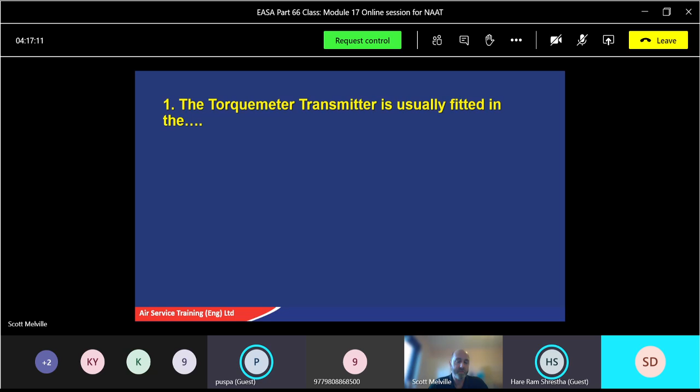Anybody got an answer? Reduction gear, reduction gearbox. Yeah, reduction gearbox - just where your PCU, your CSU, it all fits onto the reduction gearbox. Torquemeter transmitter, good.

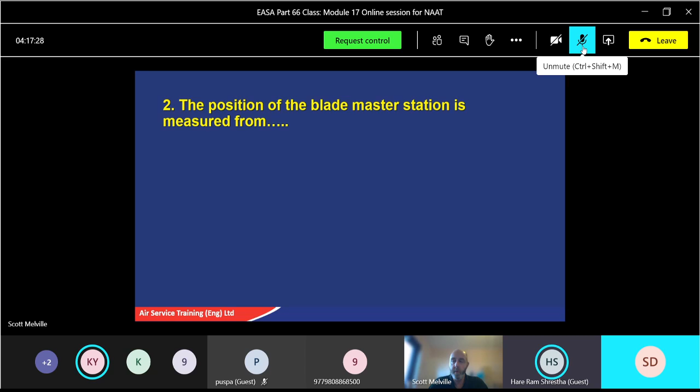Question 2: the position of the blade master station is measured from where? Center of hub. Yeah, center of the hub, good. Just for a bonus point, what colour would it be on the blade? Yellow, yeah, like normally. Sometimes they have them, sometimes they don't. If it doesn't have one, you just measure it from the hub.

Number 3: the blade angle on the propeller is the angle between what? Angle of attack plus advance angle? Not quite, no - it's the blade chord line and the plane of rotation. So the plane of rotation is vertical, the chord line of the blade, and in between that you've got your relative airflow. That gives you your blade angle, with the helix angle being a bit in between as well. We'll put a diagram up - hopefully you've been given the printout, and if not I'll show you what I mean.

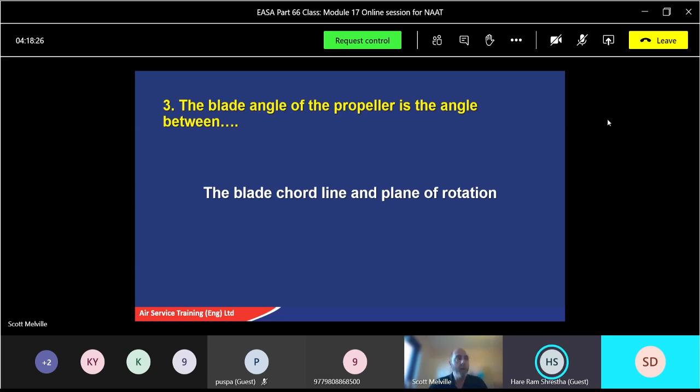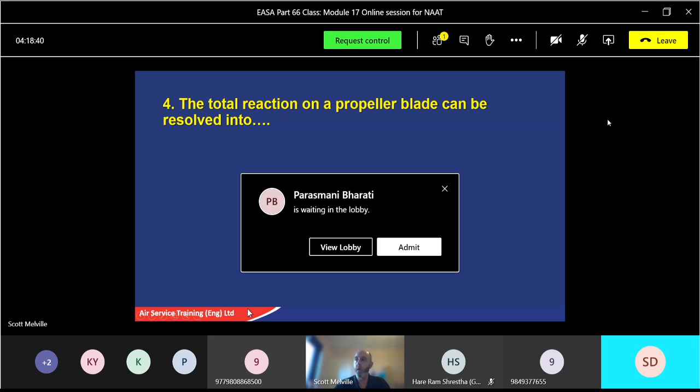Question 4: the total reaction on a propeller blade can be resolved into what? Thrust and torque. Yeah, so total reaction is the resultant between those.

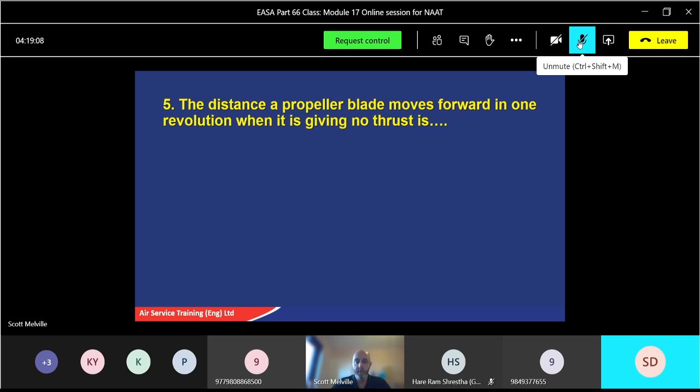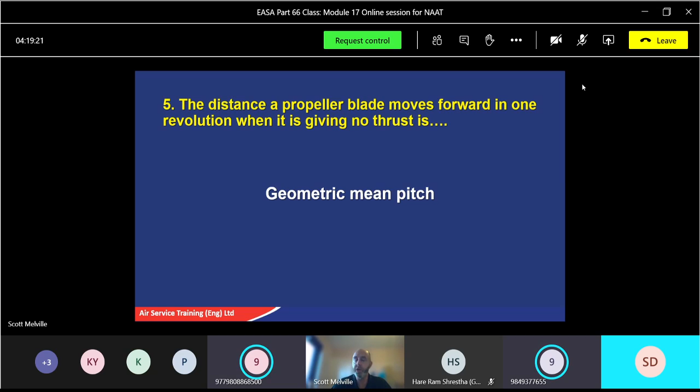Number 5: the distance a propeller blade moves forward in 1 revolution when it's giving no thrust is called? Geometric pitch. Yeah, it's theoretically what should actually happen - when there's no thrust, it should travel that amount of distance in one revolution in theory, but we don't get that because of aerodynamic forces. That's the geometric mean pitch, or geometric pitch as we call it.

Question 6: during forward flight, the propeller angle of attack varies with what? Forward speed. Yeah, so if we increase speed, the angle decreases. If we decrease speed, the angle obviously increases.

The thrust force during flight causes propeller blades to physically do what? Bend forward. Yeah, the blades are trying to go forward because they're getting the thrust, or what we used to call lift on a wing. So they're trying to bend forward, and that reaction is pulling the aircraft forward as well - they bend forwards in the direction of flight.

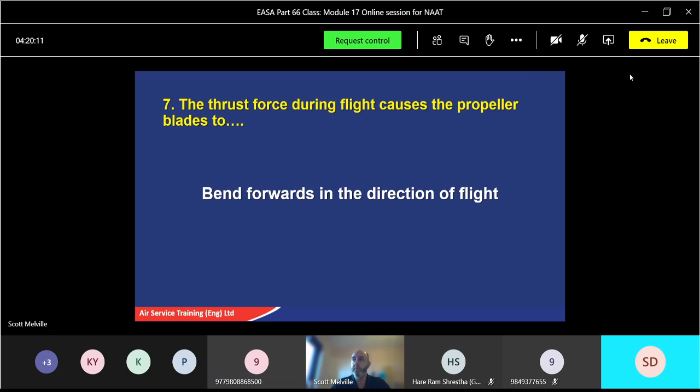The flyweights in a propeller control unit will actuate what? In other words, they will move what? What will the flyweights move?

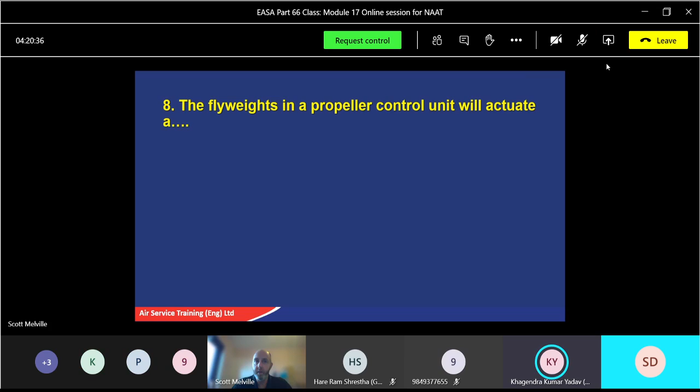What have we got there? The slide valve, or the pilot control slide valve. Basically the vertical valve that moves up and down, because your flyweights, as they get faster, will spin outward and lift the valve up. Or if they get lower, because they're going at lower RPM, they'll drop the valve down until they get to a neutral position where it stays.

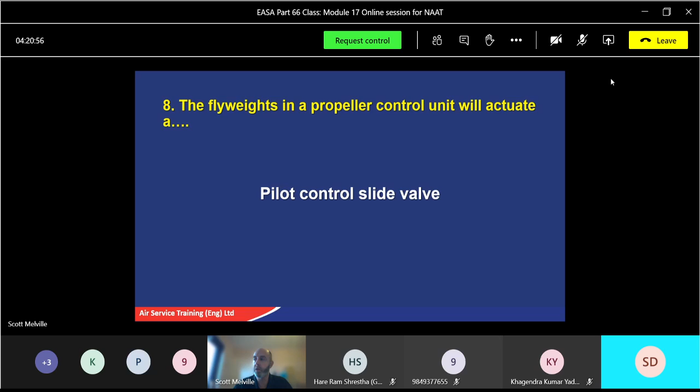With a double action propeller, the on speed position is when oil is trapped in front and rear of the piston. Basically, you've got hydraulic lock, equal pressure in the front, equal pressure in the back. It's balanced up, the flyweights will be pretty much even, and we're in the on position. We're good to go, it's happy. It's waiting for a change in forward speed, a change in RPM, etc.

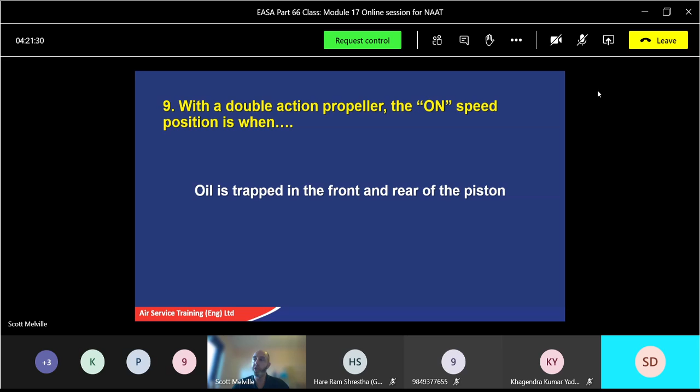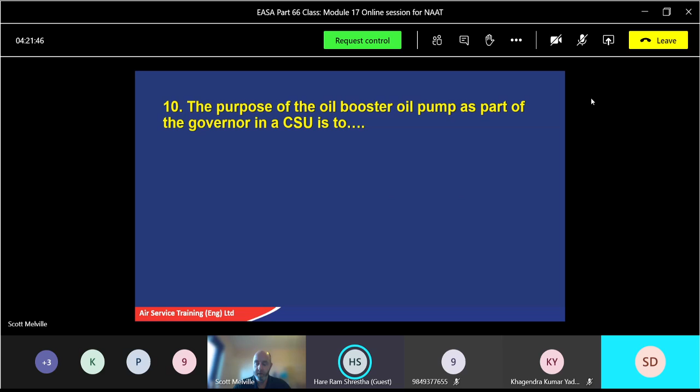Number 10, the purpose of the oil booster pump as part of the governor in a CSU is to unfeather the blade - provide enough oil force to move propeller blades into coarse pitch or feather pitch. Okay, next, the booster.

In a double acting variable pitch propeller, the feathering pump supplies - what does it supply? It supplies oil pressure to drive the propeller into and out of feather. Now, the pump itself doesn't supply the pressure, it supplies the flow, and your pressure is the resistance to flow, which is your pipework associated with that. But yeah, we can call it pressure in a way, just for general purpose, okay?

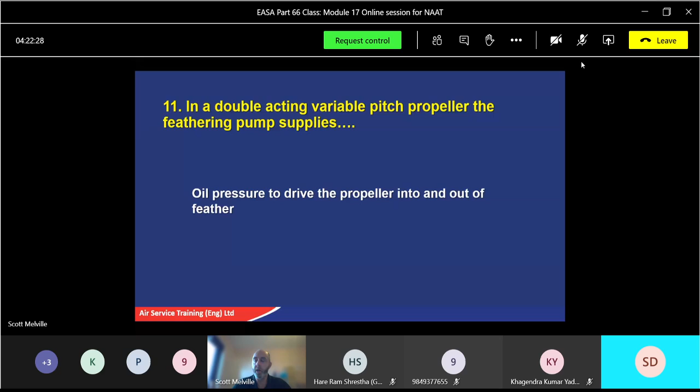Negative torque will occur on a propeller blade when angle of attack is negative. Strange enough, as it says in the question - sometimes the clue is in the question. The angle of attack has to be negative.

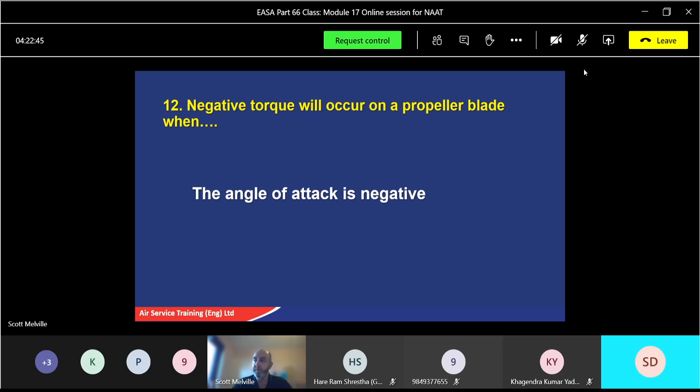Number 13, small stone damage to a propeller blade would affect its integrity - yeah, structural integrity. Any small stone damage, well, that's going to be a weak point. A weak point can possibly lead to a crack, and if there's a crack, that's very detrimental to the structural integrity.

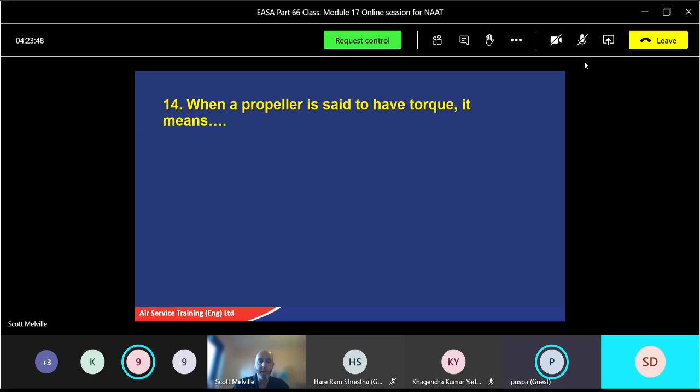When a propeller is said to have torque, it means it has resistance. This is the hardest way to do it, without the answers there as A, B, C - it's the harder way. When it comes to an exam, if it comes to push, read the question, think of an answer, and then look at the options you've got. If one of your options matches what you're thinking about, hopefully that's the right answer. So basically, we've got torque. What is torque? Torque's the twisting moment, isn't it? So the turning moment force produced by the propeller about the axis of rotation. We're getting torque, the rotation of the propeller, against the rotation of the axis of the engine. That's your twisting moment, that's your torque, that's where we get torque from.

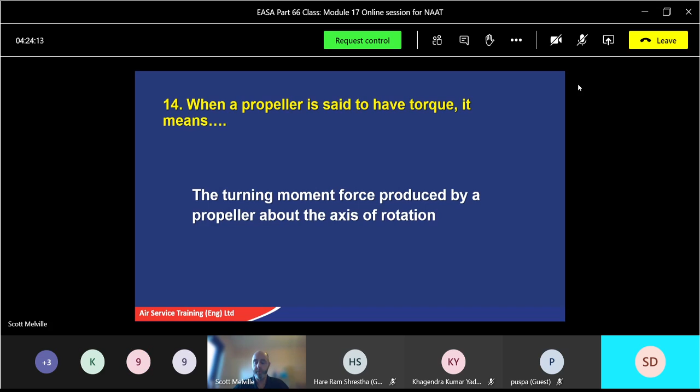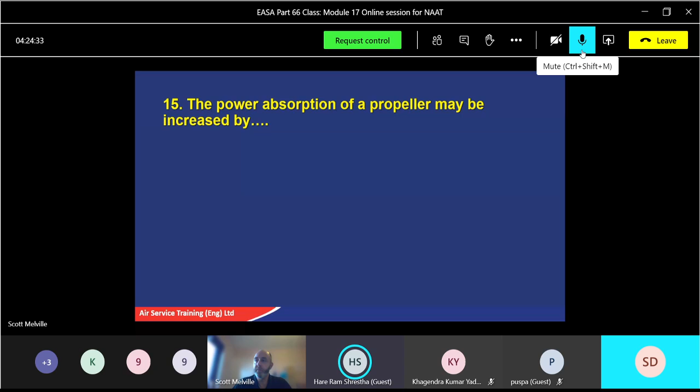15, the power absorption of a propeller may be increased. There's a few methods, a lot of things we can do here. What do we think? How do we increase power absorption? Increase number of blades - yeah, that's one of them. And the chord line, increasing chord line - the width of the blade. So increasing the camber and/or the number or the width of the blades. Quite a few things there. They'll give you some options for examples, but that's what you're looking for. In other words, increasing solidity of the blade.

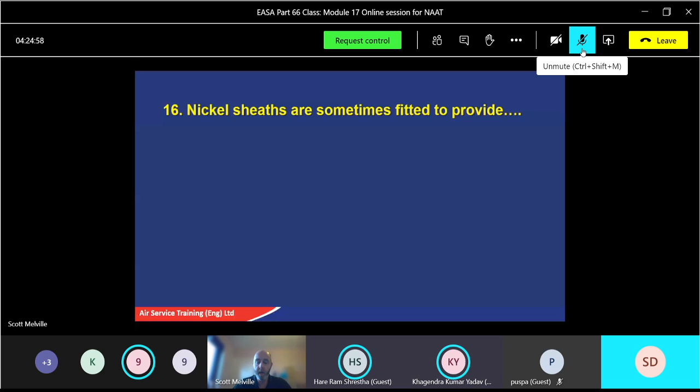16, nickel sheaths are sometimes fitted to provide protection - yeah, erosion protection, because the leading edge is at the forefront, going through the air, getting friction. It could hit hail, rain, or maybe sandy type air, so a bit of erosion there. So it helps protect against erosion. They can be replaced, and that saves the propeller.

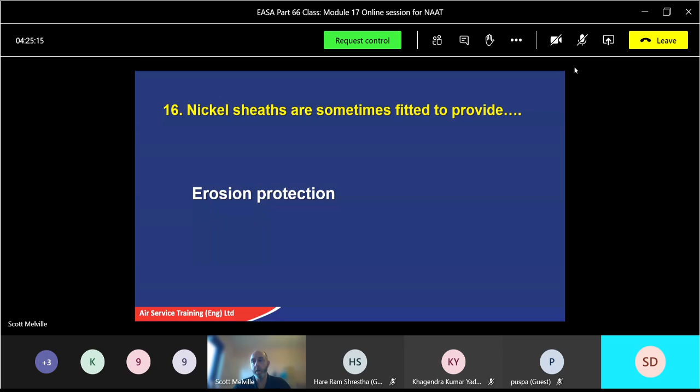17, some propellers are fitted with accumulators, and what's the purpose of those? For the purpose of unfeathering - yeah, when we do have a low RPM, unfeathering the propeller. Yeah, good.

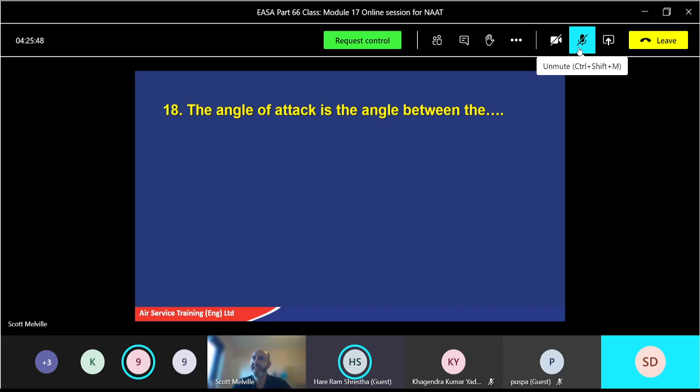18, the angle of attack is the angle between the chord line and relative flow. You won't see 'easy peasy' in the exam - it's chord line and relative airflow.

19, to obtain the very high power required at commencement of the takeoff run, the propeller is set at what angle?

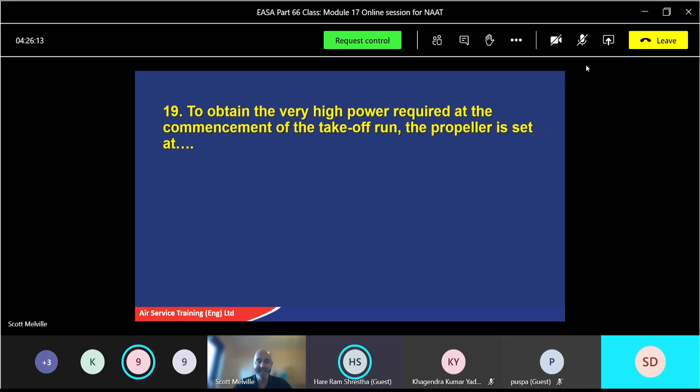Fine pitch, and max RPM. Fine pitch position allows the engine to attain maximum RPM, so it can cut through the air nice and easy. If it's at a high angle, there's a lot of pressure trying to get through the air, so we cut it fine. We get maximum torque, maximum power, meaning we can take off quite quickly.

20, if the engine RPM is to remain constant on an engine fitted with a variable pitch propeller, an increase in engine power requires...

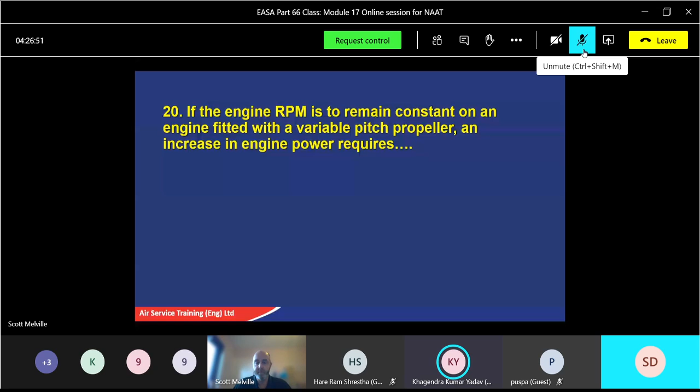Think about the pitch - increase the blade angle. So if we increase the power and want to maintain that same RPM, if we leave the blade angle at a very fine pitch, it's going to spin through the air a lot quicker. So by increasing the angle of attack, that puts more load on the propeller, which will maintain that constant RPM.

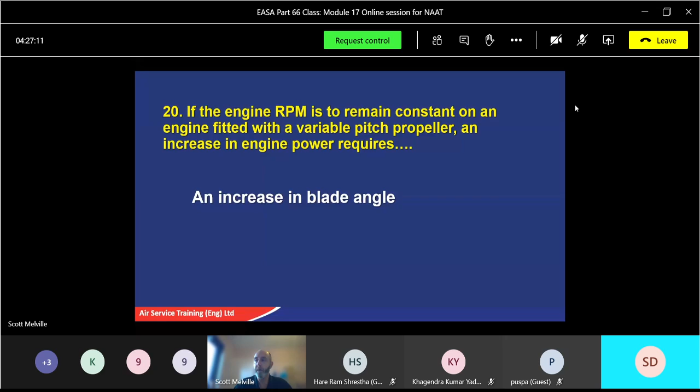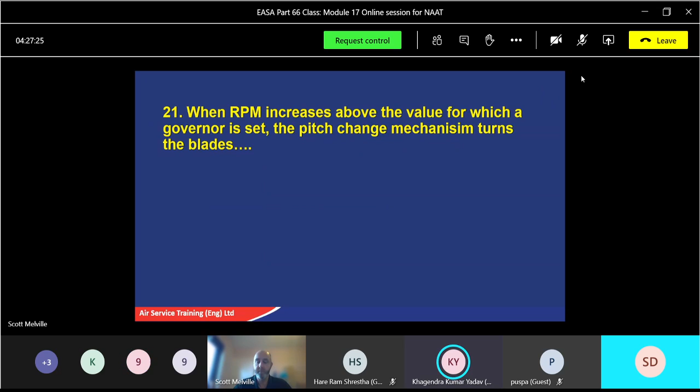21, when RPM increases above the value for which a governor is set, the pitch change mechanism turns the blades to a coarse angle - a higher, coarser angle, increasing the load on the engine, just what we described already.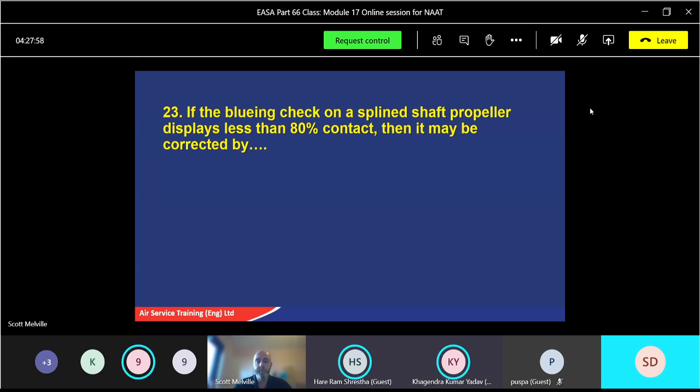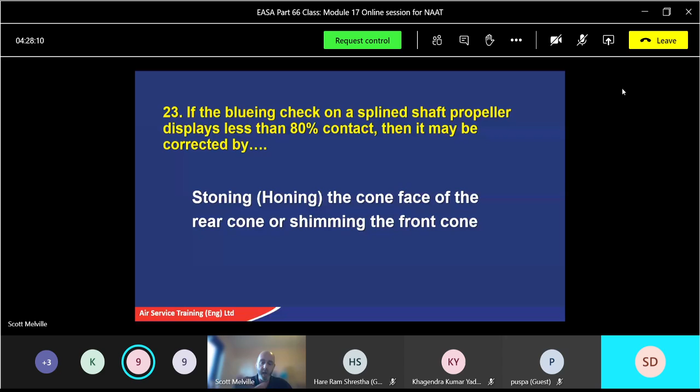If the blueing check on a splined shaft propeller displays less than 80%, it may be corrected by honing - page number 127. So we hone the face of the rear cone, or we can shim the front cone. It's done by rubbing it down on a little surface plate.

25. On-wing storage of a propeller will require the propeller to be exercised so that it eliminates the need to do what? So it's on the wing, we're exercising - what does it eliminate? In other words, what do we not need to do?

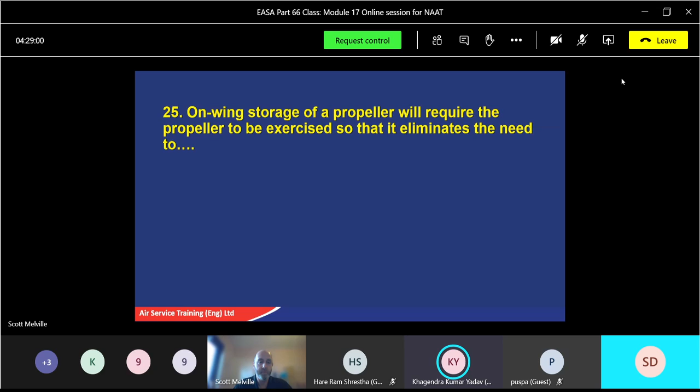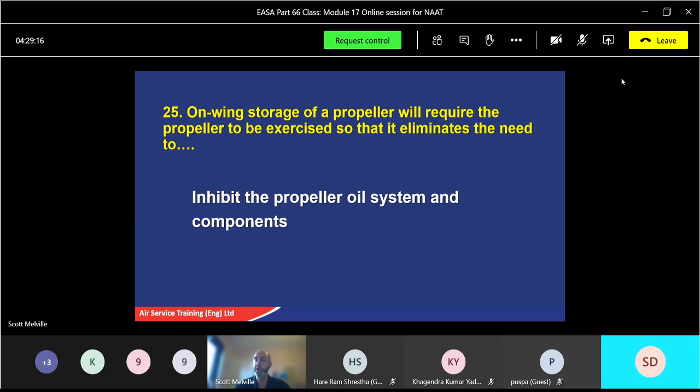Oil system and component - inhibit the propeller. We don't need to inhibit the propeller because it's self-contained. As long as the engine is still working and we can run the engine, we can exercise the piston of the pitch change mechanism, exercise the blades, and that will maintain it and help prevent corrosion.

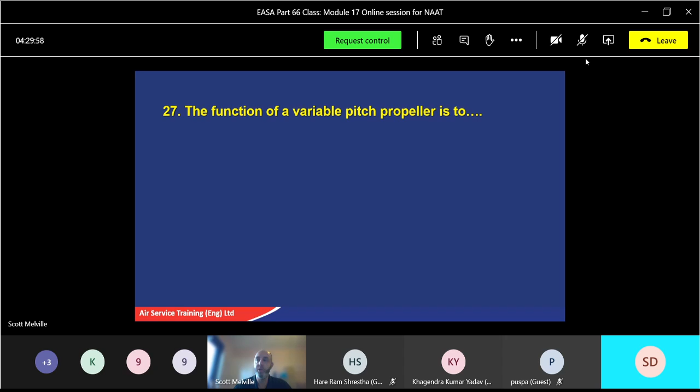Points won or lost. 27, the function of a variable pitch propeller is to do what? It's hard to see without the rest of the answers, but hopefully you can figure it out - obtain the most efficient engine performance for the varying conditions, altitude, speed, etc., which is to maintain the optimum angle of attack in effect.

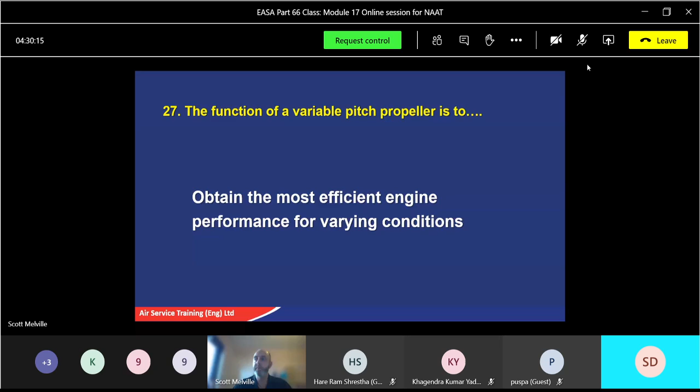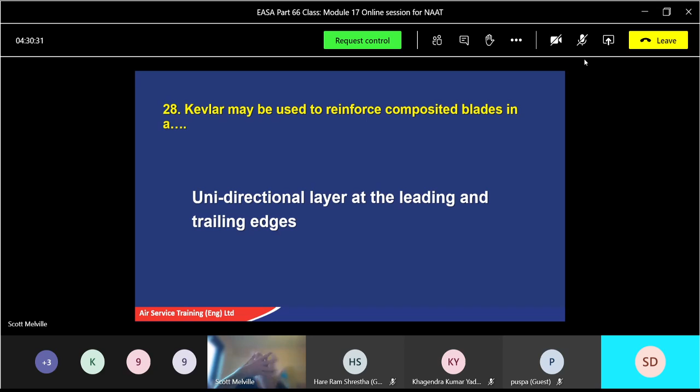28. Kevlar may be used to reinforce composite blades in a leading edge and trailing edge with unidirectional layering - a crisscrossing pattern, one going that way, one going this way, at the leading and trailing edges.

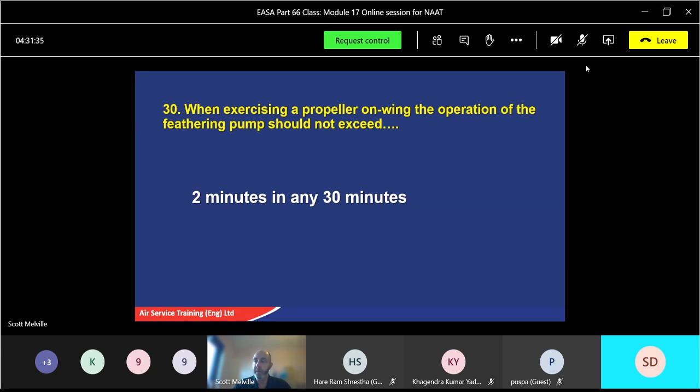30. When exercising a propeller on the wing, the operation of the feathering pump should not exceed 2 minutes in any 30-minute cycle. They might give you examples like 2 minutes 30 seconds or 1 minute, some sort of random question, but the rule is 2 minutes in any 30-minute cycle. If you run it for 2 minutes, you've got to let it cool down and wait again, otherwise you'll just overheat it.

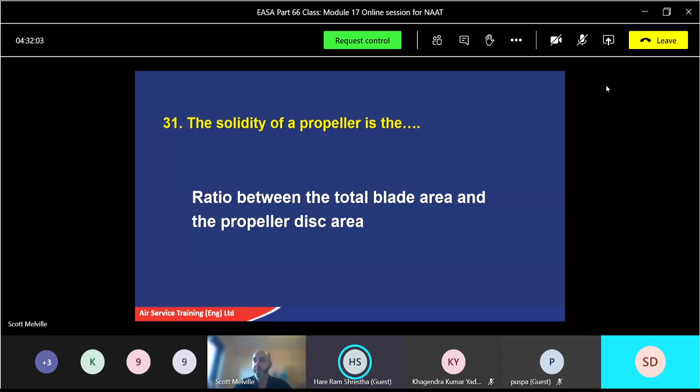32. A double-acting variable pitch propeller is one in which the pitch is increased and decreased by oil pressure. We've got oil pressure one side of the piston and oil pressure the other side of the piston, and depending on which way the valve moves up and down, we'll direct the oil flow to the front or the back to move it forwards and backwards.

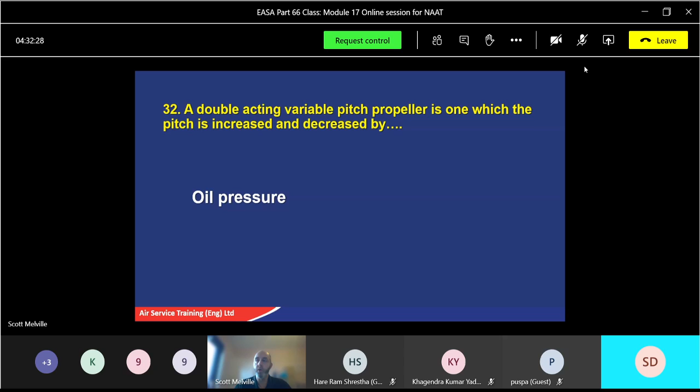33. The DTI, the dial test indicator, result from a concentricity run check should be recorded as... In the book we've got it, you add a weight. On this question, the answer says it without a weight - but if you want to change your answer to this one, I meant to change it myself. In the book, you'll add the weight to the front to take up the slack in the shaft, because the shaft will move a little bit once you've taken the propeller blade off, so the shaft of the engine will try and go up. So by putting a weight on, you'll spin it, take a reading, and then what should you do once you've got the reading?

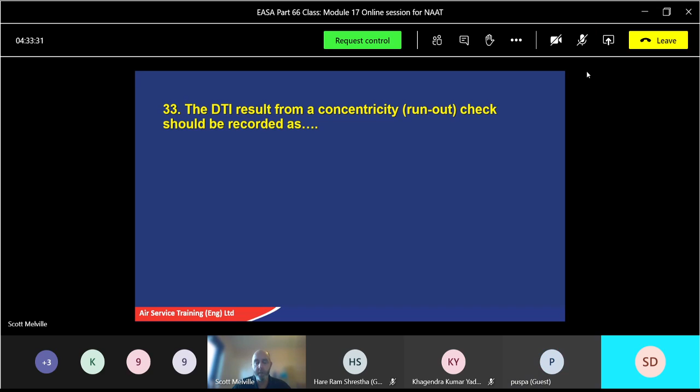So you get a reading in one position, do another position, take a reading, and then what do you do with that reading? Do you multiply it or half it? Half it, yeah. Now, the answer I gave you says double the actual reading - but that's only if there's no weight applied. If you leave the propeller without a weight, you'll get a small reading, so you'd have to double it. But by adding a weight as it is in the book, you would half the reading. So if you want to change that answer to add a weight and then half the reading - if you don't put a weight on the end of the shaft, then you double the reading, because you have a smaller reading. Does that make sense?

Imagine the shaft without a weight on it - it's going to move up a little bit, so when you put your DTI up there, you'll get a very small reading. But when we put the weight on, we bring the shaft down and get a larger reading, but then we half it. So if you want to change your answer to half the reading, provided there is a weight on it - I've just put it there as double the actual reading if there's no weight applied to the front of the shaft. Because when the assembly comes off, the shaft will try and go up because it's got a big turbine stuck at the back of it, so it's going to try and lift the shaft up. That's why we put a weight on the front, take a reading, then half it. I want to change the answer on that question, but as long as you understand the concept, that's fine.

34. Don't forget, when ground running a single engine turboprop aircraft, the torque pressure recorded should always be above minimum - above the minimum acceptable figure.

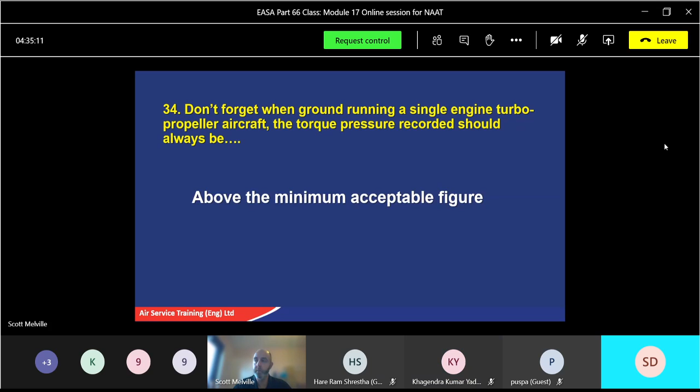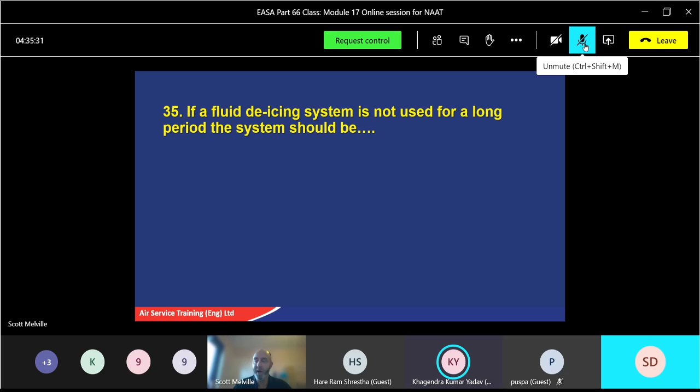If a fluid de-icing system is not used for a long period, the system should be flushed with a methylated spirit and water mix. What's the percentage? 95% methylated spirit and 5% distilled water, not just normal water. You want to amend your answers to make it distilled water mix. Basically, it flushes it out, cleans it out, and dries it out.

When the CSU is in the underspeed condition, oil will be directed to where? Imagine that the weights have gone down for the underspeed condition. So the oil is going to be directed to decrease the blade angle, to make a smaller angle of attack. So decrease the angle, good.

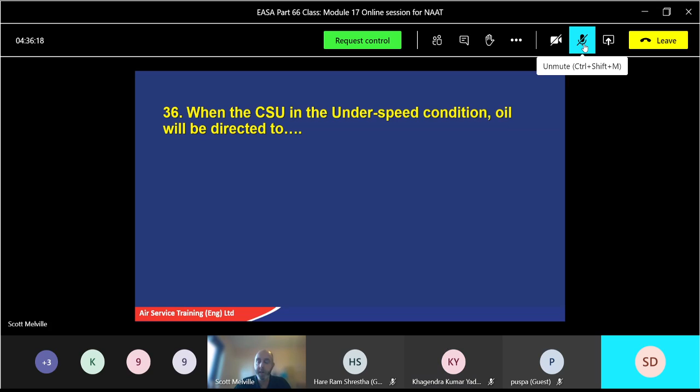That would be a double acting one, obviously. The geometric pitch of a rotating propeller is the effective pitch plus slip. Slip plus the effective pitch. That's the geometric, in other words the theory where it should go. Unfortunately there's always a little bit of slip, and you might have to do a calculation. So if you make a note in your books of how to calculate slip, you might get asked that in an exam, possibly. It will be easy numbers to play with.

Is that one? I forgot to change that question. Why did I miss that one out?

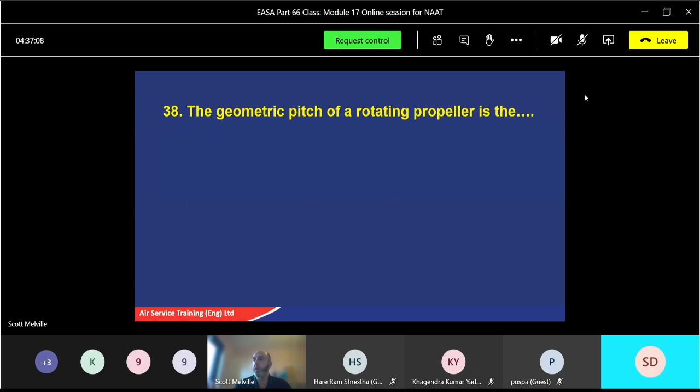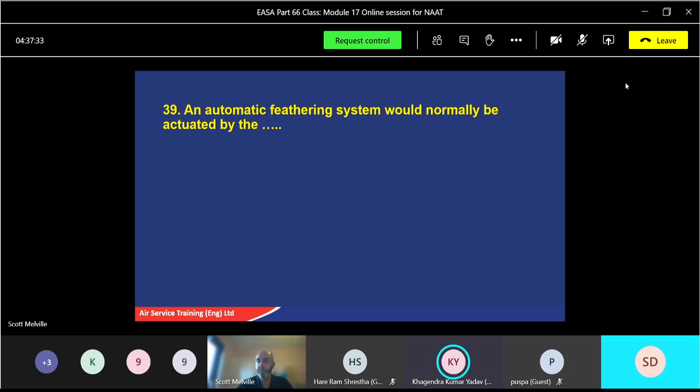My fault. Okay, 39. An automatic feathering system would normally be actuated by the what? So what's going to move an automatic feathering system? Torque meter. Yeah, torque meter system, good.

40, a centrifugal feathering stop will prevent the propeller doing what? Feathering. Yeah, strange enough, feathering after normal engine shutdown.

41, a controllable propeller makes it possible for the pilot to do what? To change the blade angle. Yeah, simple as that. Change the blade angle.

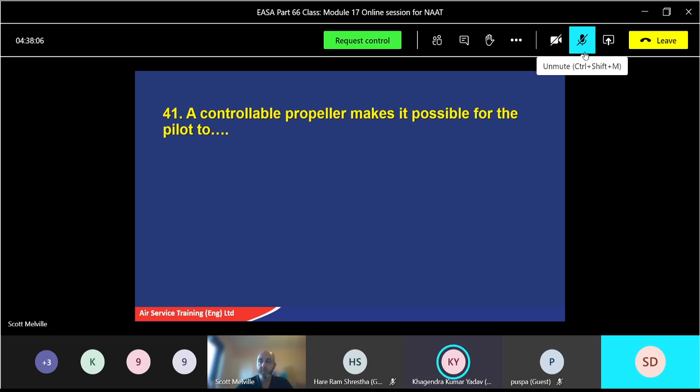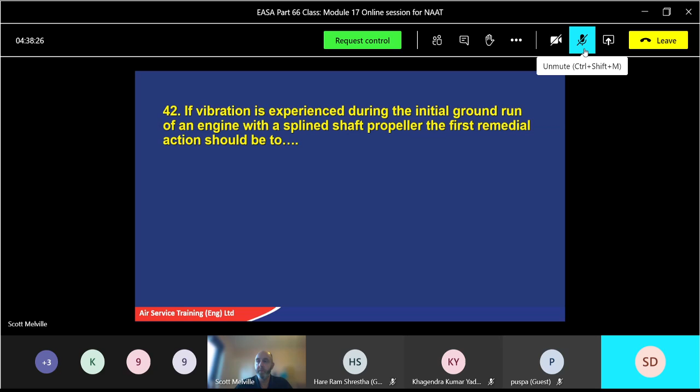42, if vibration is experienced during the initial ground run of an engine with a splined shaft propeller, the first remedial action should be to do what? What would you check first? Hub nut. Yeah, check it, retighten or torque the hub retaining nut after obviously the engine's cooled down, because thermal expansion can change the size of it.

So let it cool down first, obviously it'll be quite warm to touch. Retorque it, and if the torque's fine, that's all good. But remember, you've got the rear cone and the front cone, and they sometimes need to bed in a little bit, especially if it's a new propeller put on there. If it's still slack, for some reason it might go tight, but again you might have to check the cones, shim the cones or hone the cones as well.

43, when the engine is running, the CSU is continually sensing what? Engine RPM. It needs to know what's going on, and obviously the flyweights in there will be sensing that.

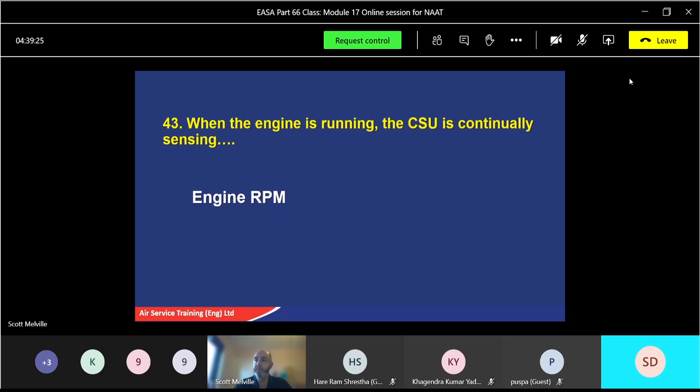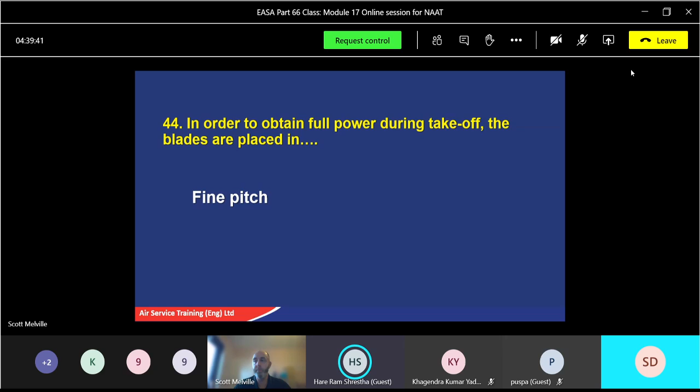To obtain full power during takeoff, the blades are placed in what position? Fine pitch, or low angle of attack. Again, the answers might give you fine pitch, coarse pitch, and some sort of random name.

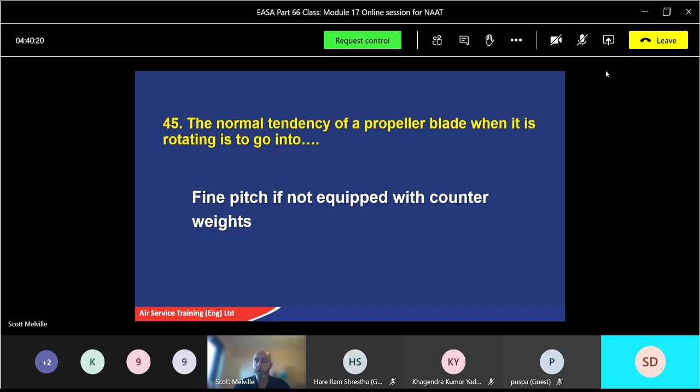45, the normal tendency of a propeller blade when it is rotating is to go into what position? Fine pitch, if not equipped with counterweights. Now the counterweights on the back help it go to a coarser pitch just by centrifugal action, as we call centrifugal counterweights. So without those, it will tend to go into fine pitch. So those weights which are off the axis help throw the blade back out again, all in conjunction with the oil pressure.

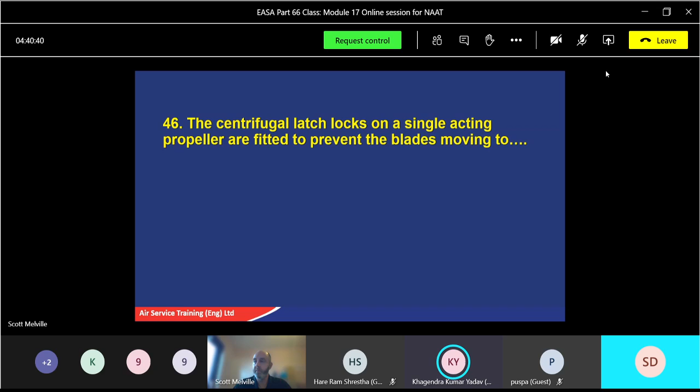46, the centrifugal latch locks on a single acting propeller are fitted to prevent the blades moving to where? To feather position. Yeah, when the engine is shut down and not running. Good.

47, the most common method by which the propeller is exercised is to do what?

So how would you exercise this? Need an option for this answer. I'll think about it. How's the most common method? What's the easiest way to exercise the blades? I know it's hard without the answer being there. Okay, I'll put you out of your misery.

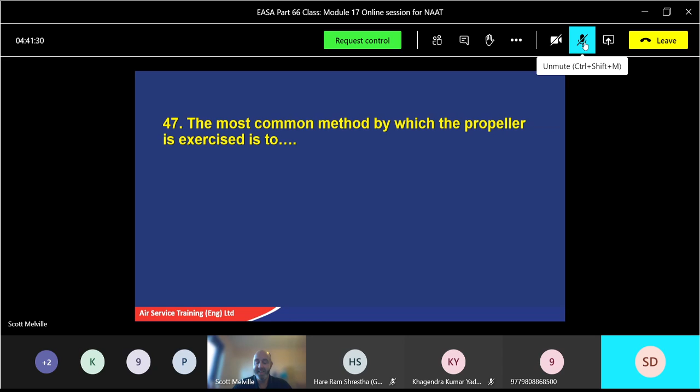Move the pitch control from fully fine to fully coarse at least twice and check that RPM is the same when fully fine. So in other words, engine running, fully forward, fully back, fully forward, fully back, and so on. I think in the book it says 4 to 5 times, but at least a minimum until you feel it has got rid of the air, if you put a new system on, or you're just exercising it for storage purposes. So pitch control, fully fine, fully coarse, at least twice minimum.

Centrifugal twisting moment will tend to do what? Again, it's just a recap of the question I had earlier. Turn it to what position? Fine pitch - decrease the propeller angle, or make it a fine position. Just different terminologies.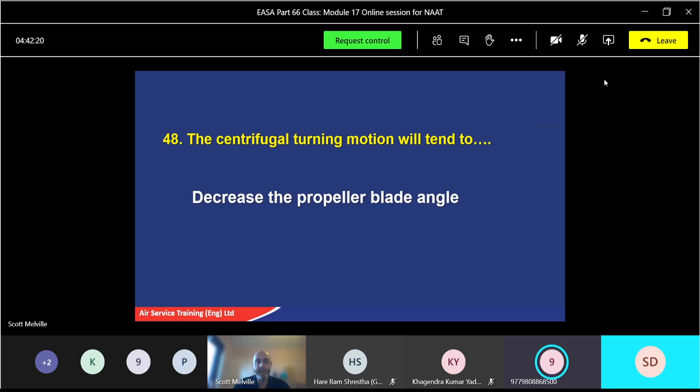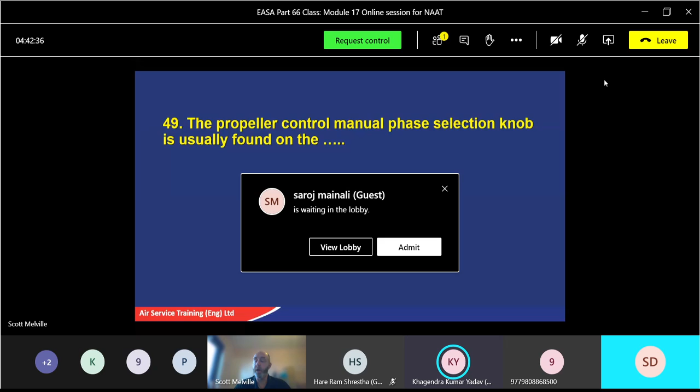The propeller control manual phase selection knob is usually found on the what panel? In cockpit, the synchronization panel, or synchrophaser panel, and is used to select the ideal phase angle. Remember, we'll set the synchronization up first, which is the master RPM is set, and then the slave engines will then meet the same RPM. Once you've got that, then we move when the blade angles out. How it does that is it will either slow down the RPM to move the angle and then catch the RPM up, but by the time it's moved down, the angle of the blade is out of the way. Once it's set, it will stay in that position. You can physically move that control knob to move the angle of the blades as they go back and forward - not the pitch angle, it's just the position where the blades start and stop.

For takeoff, the propeller control is usually set in what position? Fully forward - so fine position.

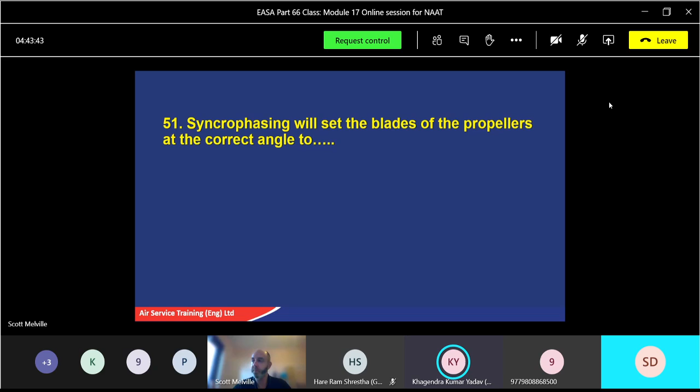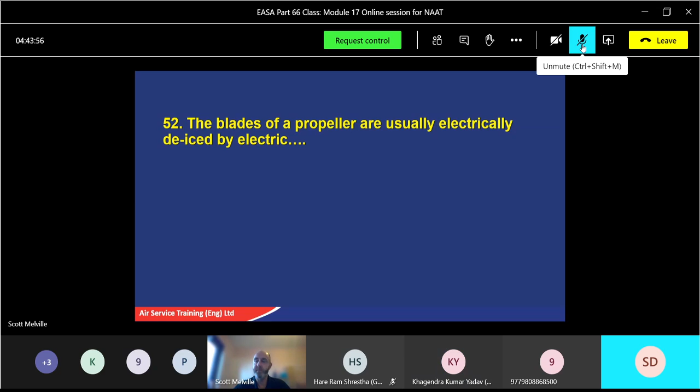The blades of a propeller are usually electrically de-iced by electric heating elements that are underneath the rubber boots on leading edges of the blades. Remember your cycles, your fast cycle and your slow cycles.

When the propeller blades are moved from the reverse pitch to flight normal, they move through what position? Ground fine pitch - good.

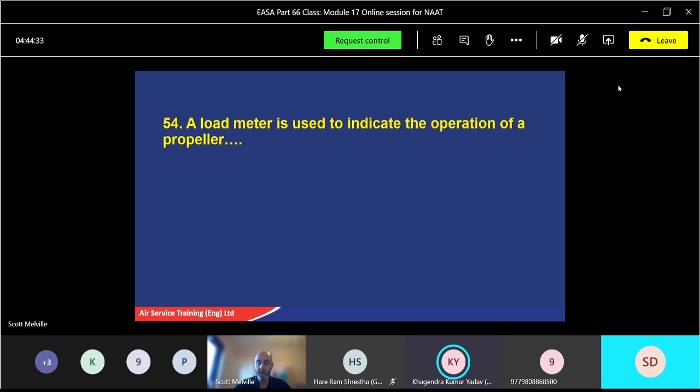A load meter is used to indicate the operation of a propeller's what? Electrical de-icing system. Remember, you might just have one gauge for maybe a twin engine aircraft, but certainly for 4 engines, they probably have 4 gauges. And remember, when the anti-icing or de-icing system is activated, how many gauges out of those 4 will you see activated at any one time? Will you see them all activated, 2 activated, or just 1 activated? Only one - there should only be 1 propeller assembly have a load indicated on the indicator, and it will alternate between the engines. It will be sequencing - that's right, you're sequencing. And you'll have a null period when there's nothing at all, so there'll be 1 indicating with the current load.

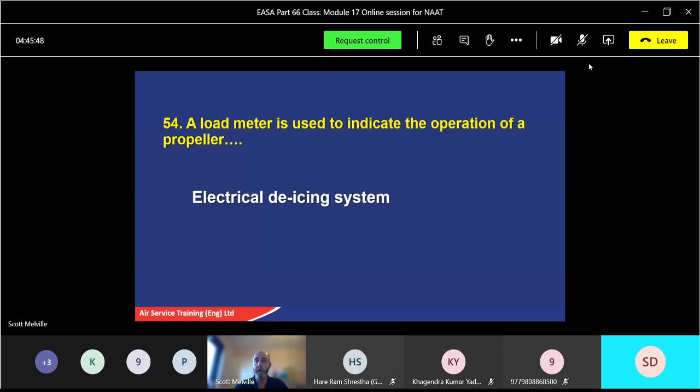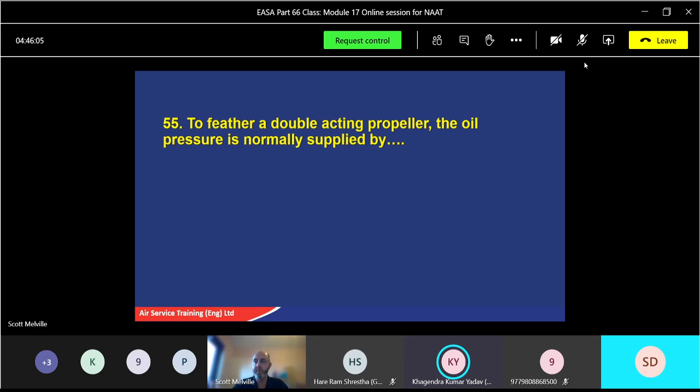To feather a double-acting propeller, the oil pressure is normally supplied by what? Oil pump - an auxiliary electrical driven oil pump.

The counterweights on a typical single acting propeller will act against what movement? CTM - centrifugal twisting moment.

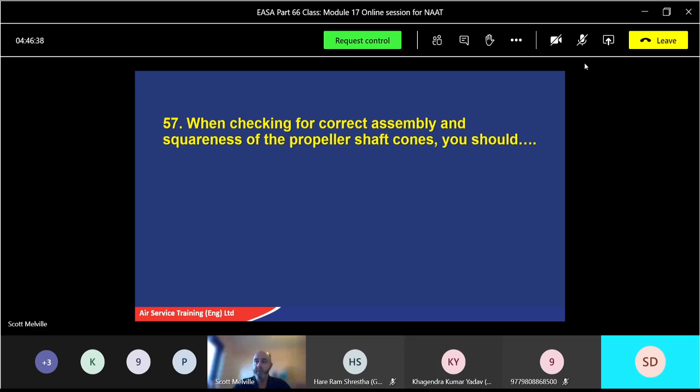When checking for correct assembly and squareness of the propeller shaft cones, you should do what? Blue checking - smear engineer's blue to the front and the rear hub seating. And remember, when you put it on, tighten it down hand tight, rotate it 1 revolution, take it back off, and how much should come away? It should be a minimum of what percentage?

What percentage should it be? You don't want to see all the blue—a lot of the blue should come off. It should be a minimum of, anybody remember a percentage? 80%. Okay, so the blue will come on, you paint it on, rotate the blade once, take it off, and if it's still blue, that's not good—it means it's not contacting at all. So again, shimming it or rubbing it down, rub it again, put some blue back on, spin the propeller, and hopefully at least 80% of that blue has come back off.

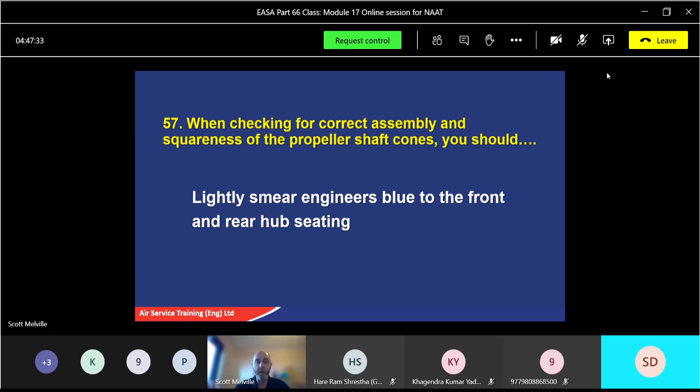Synchronization systems usually allocate the master engine as in what position? Is it left engine, number 1? Yeah, left hand, usually number 1 position. Certainly a twin engine would be number 1, the inboard engine. On maybe a 4-engine aircraft, they might allocate that to the number 2 or 3 engine. But again, with a master, you can select whichever engine you want. And if you have an engine failure in flight, what's going to happen if the master engine fails? What could happen to the other slave engines? All the slaves will follow the master—the revs will probably try and catch up thereabouts.

Question 59, during synchronization operation—there we go, so just preempt it there for you. Failure of the master engine can result in slave engines—quickly said, they will try and match whatever the master engine was doing.

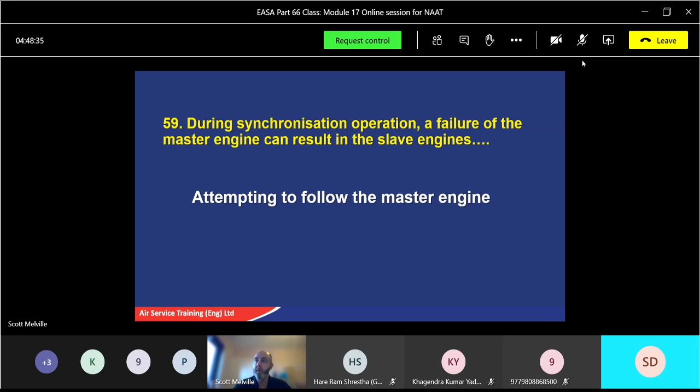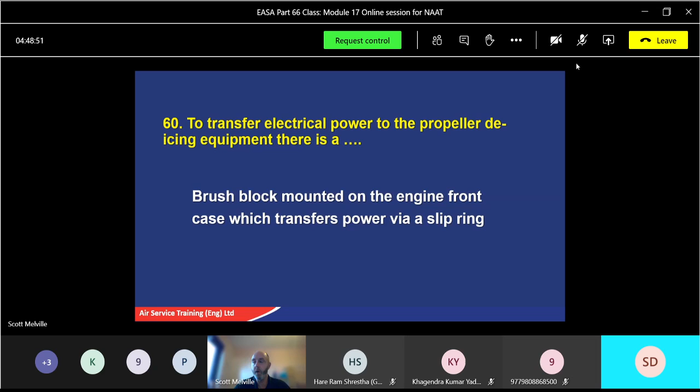Transfer electrical power to the propeller de-icing equipment—there is a what? Yeah, a brush block mounted on the engine front case, which transfers power via a slip ring.

On a fluid de-icing system, the check valve is normally located between the pump and the slinger ring feed tube, which will prevent or stop what's happening. To prevent the draw of fluid—yeah, in other words, siphoning. Have you ever tried it? Have you ever taken fluid out of a tank, or hopefully not out of a car? You get a tube, put it in the fuel tank, suck a little bit, and then through gravity it will keep going, and just by the momentum of the fluid it will suck the fluid back out of the tank. Same with a de-icing system—once the fluid's moving, unless you put a check valve in there, it will just empty the tank out. It'll certainly stop your aircraft from icing up, but you'll lose all your fluid very quickly. So have a little check valve in there to stop it—and it also helps prevent evaporating. That's right as well, yeah, definitely. So it stops siphoning fluid in flight when the system isn't operating, and we don't want it to empty itself out.

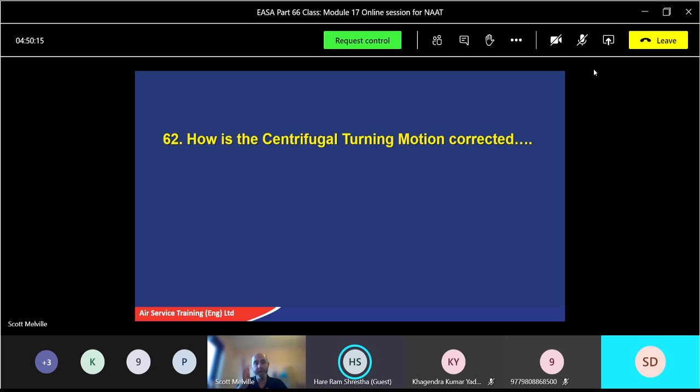Question 62: how is the centrifugal turning moment corrected? Counterweights, yeah, so they're off the axis of rotation. The counterweight assembly is attached to the blade ferrules, outboard of the retaining ring and forward of the cambered base. There we go, just a short selection without the ABC.

It's always harder to try and come up with an answer yourself. What we do here at AST, we give some students one-on-one sessions—I'll take them individually into the hangar, show them all the equipment, ask them questions, and they have to answer back, and that's part of their test now. So when it comes to their theory test, they'll have the ABC answer already formed. Hopefully for you guys as well, when you go to do your theory test, think of an answer first to the question, then look at the answers on the paper and see which one's closest. There might be one or two that seem quite close, but take your time, read the question, think of an answer, then find the one that's closest—or you might recognise it straight away. But make sure you read the answers.